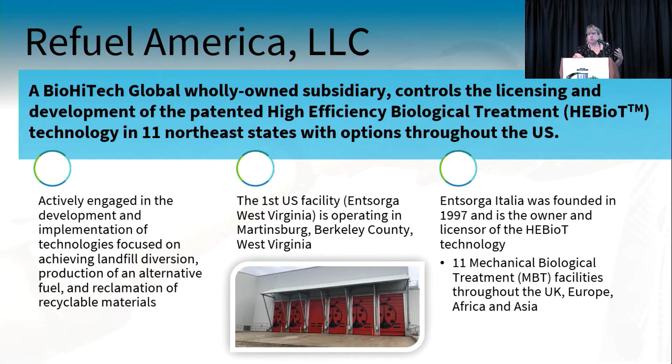As I mentioned, Entsorga West Virginia is the first facility in the United States of its kind. Entsorga Italia has 11 of these facilities throughout Europe. So we are at a commercial scale. We're not bench scale. We're not just trying it out. We have the first facility. A little bit of history about the project. It took 13 years to get this project from first thoughts of the Italians bringing it to the United States to where we are today, generating fuel.

I've been with the project all 13 of those years, from doing the permitting to getting financing to overseeing construction to actually doing some management of the facility itself. We've now hired a general manager for the facility. We are fully staffed, and I'd say we're probably at about 40% production right now, and we're growing. As we jump the hurdles of being the first and figuring out what the differences were between the European waste and the US waste, and there were some significant differences, we've been able to make modifications to our plant and to help move it forward.

Basically, the HEBioT technology takes traditional mechanical biological treatment and we kind of mush everything together. If you consider there's a three-step process, basically. There's pre-treatment, which is separating it by size. 7 inches and greater becomes an over. 7 inches and smaller becomes an under. The 7 inches and over gets made into fuel right away.

The 7 inches and smaller is majority your organic material, as well as your tins, your aluminum. Some of your metals are going to come out there. A lot of your fiber is going to come out there. That all goes into what we call our biooxidation hall, and I'm going to show you all this here in a minute in a quick video. But that biooxidation hall basically is a huge composting facility that's indoors. There are no odors from our facility.

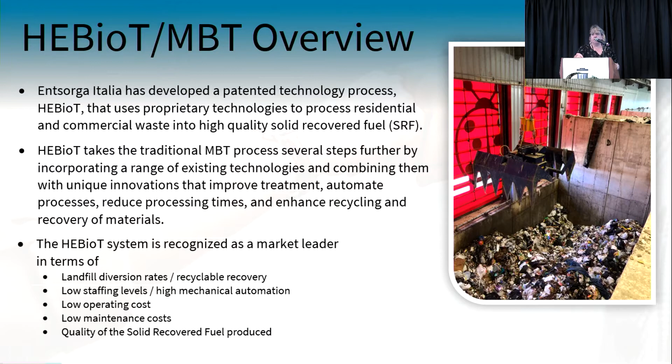So we began taking MSW. We take in municipal solid waste, just standard residential little house on the corner waste, as well as commercial and industrial materials, non-hazardous secondary materials, predominantly fiber as well as plastics, that we convert into a light, crunchy, fluffy paper by the time we're done.

That's then currently blown into the preheater precalciner at a cement plant that's located about 2 miles from us. We manufactured our first fuel in May of 2019, and we had our first fire in September of 2019. As a lot of you probably know, waste facilities like to catch on fire. So we had a lot of lessons learned from that.

We've installed thermal imaging cameras throughout the facility so that we have a constant recording of what our temperatures are. Luckily, we have not had another fire. We've actually had 2 fires, and we have not had one this year.

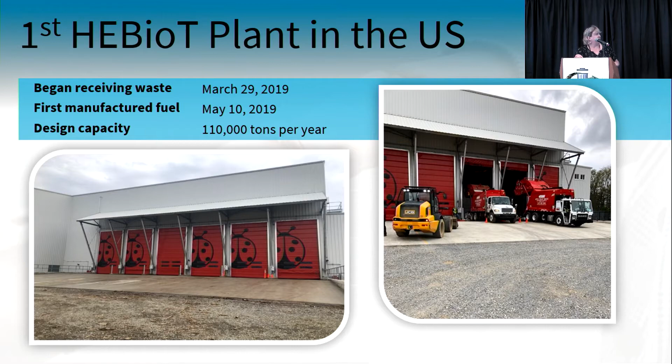Our facility right now is permitted to take in 110,000 tons per year of MSW and C&I. Right now our model in West Virginia is about 80% MSW and about 20% C&I. Models going forward, we're learning, are probably going to switch that up a little bit. We're probably going to go more like 60% MSW and 40% C&I, because the C&I market is so great,

and because the MSW market in certain areas of the country, it's hard to get that much waste all brought to one location when you put in the transportation costs. So those are some of the things that we're looking at, and we're seeing that it's working fine to change that model depending on where we are. So we have some flexibility with it.

This is a quick video. It's about 5 minutes long and gives you a day in the life of what our facility looks like, and I'm going to try and talk over it. We'll see how that goes.

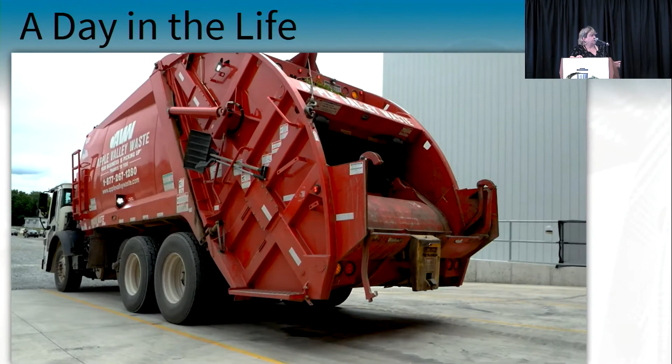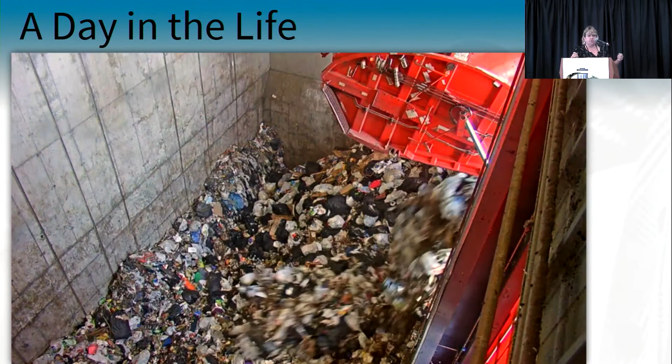So the trucks come in. Everything is automated in this plant. Trucks come in. They dump into 26-foot deep pits. Everything is from the control room. So there's no guys sorting waste. There's nobody having to touch it other than if we have mechanical issues. We have 2 overhead cranes, 3 tons apiece. We pick about 2 tons per.

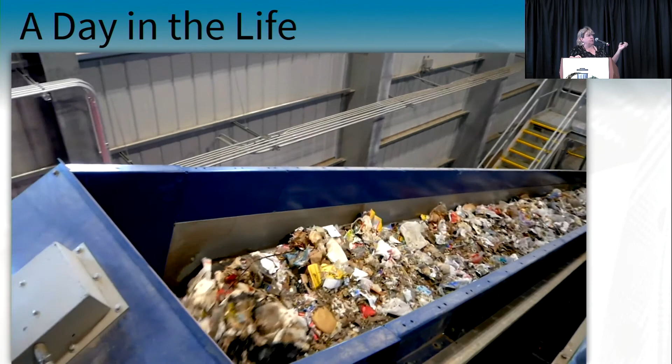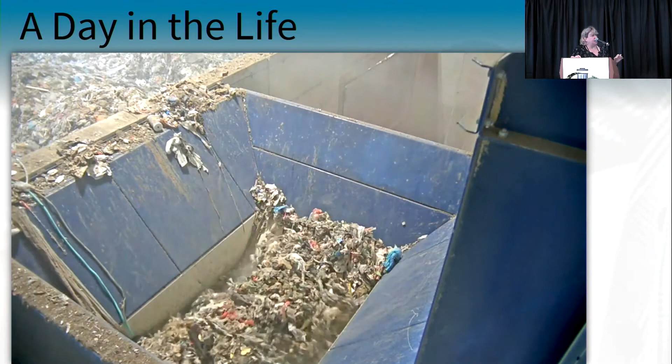It goes into the first hopper and then goes through a trommel, and this is where we're getting that sizing separation. This would be our unders, so that's our real good carbon material. That material is taken to this biooxidation hall. Currently, we have 4,500 tons of MSW in that biooxidation hall, and there are no odors.

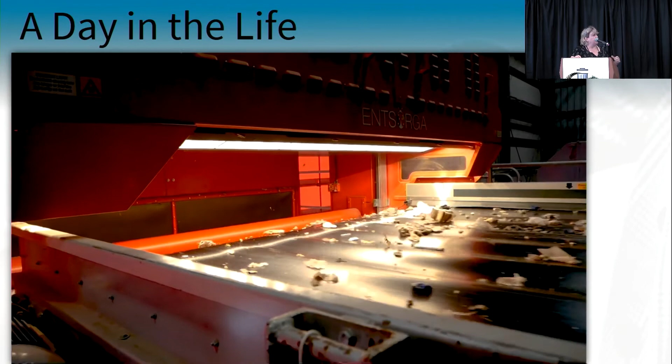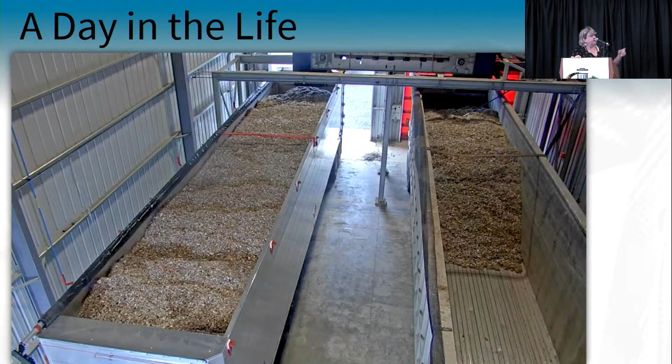That was the mezzo shredder. That's the first shredder. This is the near-infrared sorter. That's kicking out PVC plastics because we can't have chlorine in our fuel. We have 2 magnets and 1 eddy current that's pulling out the metals, the ferrous and the non-ferrous, which then go into the recycling stream of the local community, and that's the actual fuel. We haul that fuel right now in 40-foot long walking floor trailers.

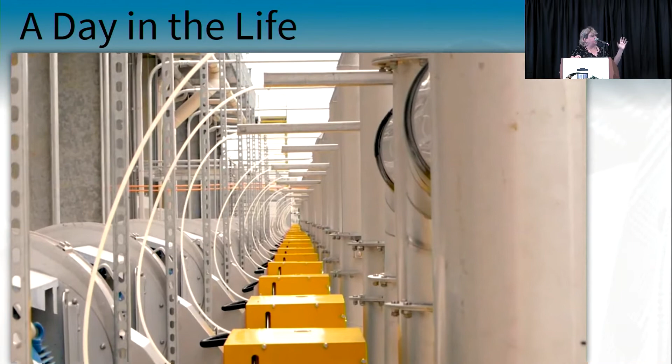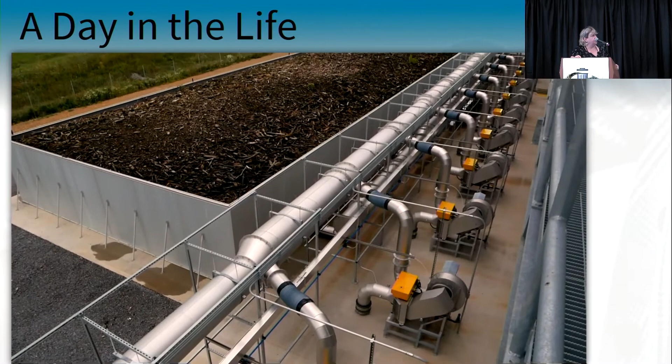This is the fan system, the ventilation system that's pulling that air out of the building and pushing it through this huge swimming pool that you're going to see here in a second. There's 26 fans. We have 24 rows of waste within the building, and then this is the biofilter itself. You'll see on the left side, that's actually Argos cement, which is using our fuel. It's about 2 miles away.

So I don't think any one of these talks is complete without figuring out where you fall in the waste hierarchy. So really where we fall in is the recycling and the composting, because we are pulling out the metals.

That biofilter that I showed you behind the facility, that material will actually be excellent for composting when it's done. And then energy recovery. Our fuel right now, the test results that we just got back, Stephen's going to give you a lot more details on it, but our test results really are coming in somewhere between 10 and 12,000 BTUs. So we are in the range with coal.

Right now it's about 1.5 tons, 1.75 tons to a ton of coal is the offset that we use. Our emissions are lower than that of coal. In order to get our EPA comfort letter, we had to show that we were comparable to or better than coal on all of the hazardous constituents. So I did a real cursory review because we just got the results back, and we actually come out even better than we did with the Italian fuel.

So that U.S. fuel is working very well in our system, and it's working very well for Argos Cement. We currently are contracted to provide them a little more than 3/4 of the fuel that we make, and they have made a request that we send them absolutely everything we can make as soon as we can make it. So that's a good thing. The biggest hurdle that we're facing right now is getting enough MSW into our plant on a regular basis.

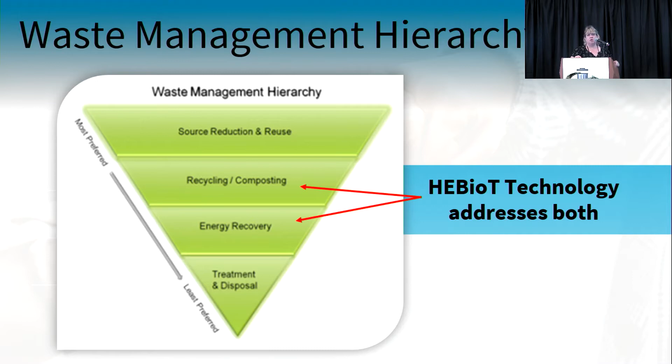So the process basically, like I said, is 3 parts. It's pre-screening, so that's the sizing. It's the biological treatment in that big biooxidation hall. It's the mechanical refinement and sorting, which is pulling out the metals and the PVC plastic and then shredding it down to that 2-inch size. We lose about 30% of all inbound weight of our material just through evaporation, through that whole composting process. We recover the PVC and the metals and the inerts.

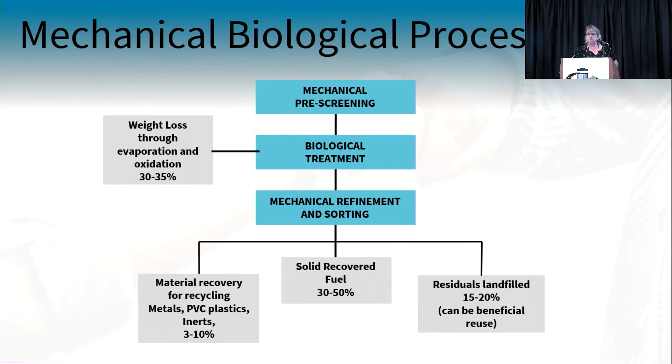The inerts in particular, we're doing a study right now with Marshall University, which is a local West Virginia university, on where those fines can be used as an aggregate in road base, and potentially in the cement industry itself. We'll be getting a lot of that data back over the course of the next month or so. And then residuals are landfilled. Those residuals are the things that you just can't make into fuel, like shoes and car seats and the other strange things that we get in the waste.

So the benefits. Our facilities are modular to some extent, where we can ramp up by size just by changing the size of the biooxidation hall and adding another line within the refinement area. So we can go anywhere from 110,000 to 300,000 tons inbound of MSW and C&I. We won't ever want to build one as small as 110,000 tons again. There are economies of scale that just don't make sense to build them that small, but that's where we had to start in order to prove it out.

We do increase the recycling rates in the community. We are located on property owned by Berkeley County Solid Waste Authority in West Virginia, and so we co-locate with them. We take all of their plastics, which they can no longer recycle. There's no market for it. They have no place to send it. So we're taking those, and they take our metals. So it works out very well. We also pay a community host fee. We pay 50 cents on the ton to the community that hosts us.

In the state of West Virginia, they have a very strange way of managing their waste. They have a Public Service Commission that basically guarantees that if you get a certificate of need within the state, then you won't have any competition. We were under the Public Service Commission. If you fell under it, you also had to pay them $8.75 a ton of everything that you made. Due to legislation that we got passed during the last legislative cycle, we're no longer under the Public Service Commission. By getting out from underneath there, we opened up the market of who we could accept, as well as not having to pay $8.75 a ton for all of our materials.

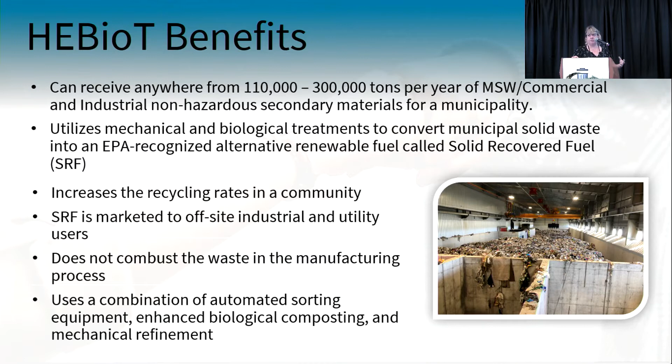The state of West Virginia saw that as a very positive move. They're very motivated to become something other than the coal state, which I find interesting, and it's one of the reasons why we chose West Virginia as the first location, because they were such a coal-centric state, and they're looking to become the technology state now.

Who is the technology right for? Well, counties, states, and municipalities that are having landfill capacity issues. You can basically think of a HEBioT facility as a renewable landfill. We just bring it in and send it out.

As you said, we make shit disappear. I really want that on a t-shirt because it can be taken so many ways in the waste industry.

We do achieve a more sustainable and modern waste management system. Waste management is on the forefront right now. We've spent 30 years educating people on recycling, and I don't know that it was overly successful. And we now need to spend the next couple of years educating people on the value of waste as a commodity and where it can be used to create energy within our country. We're behind on that, and I really think that needs to be a focus going forward for anybody in this industry. It is good work conditions.

For our facility, we run 18 hours a day, and we run it with 15 to 18 people. Right now, labor is really hard to find and really hard to keep, so that's another one of the challenges that we're facing. It is a fully automated process, so everything is done from the control room.

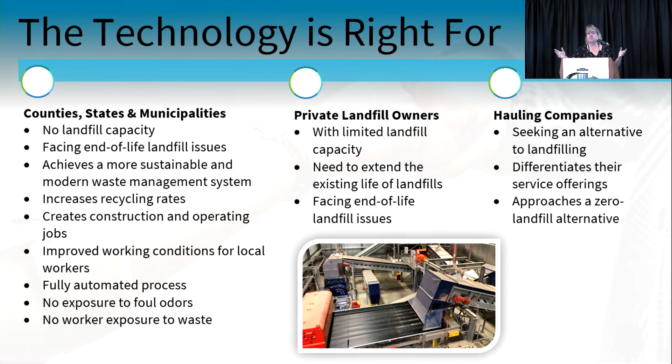Private landfill owners also, who have limited capacity, who need to extend the life of their landfills, this is a good option. Co-locate one of our facilities on your landfill. You can even harvest landfills and feed our facility, is one of the other things that can be done with it. And then hauling companies. It differentiates you. I know none of you guys are probably in the hauling world, but haulers now need to find a different story to tell as to what they're accomplishing.

So what have we accomplished in our first full year, which would have been in 2020? We received 23,492 tons of MSW, so we were only at about a quarter of where we need to be. We received 3,667.45 tons of C&I waste, and that's growing every day. We sold 11,062 tons of SRF, so 615 trailers made their way over to Argos and back. And we have already achieved the 615 trailers so far this year, so we are improving. And then 41% of our inbound volume was converted into a high-quality SRF, and that's right within the metrics of what we thought it would be.

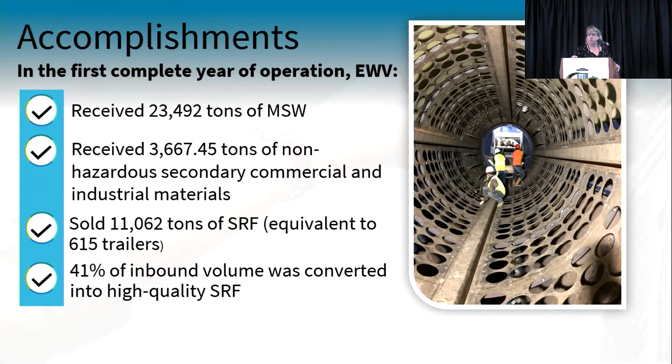So what's next for us? Well, due to West Virginia passing their legislation that made it so that we were considered a manufacturer and no longer a solid waste utility, we're looking to build more facilities in West Virginia. They want us, and we like to be there. We do have a permit in process in Rensselaer, New York. We have other projects in the New York area that we're keenly pursuing, and we're being pursued as well, which is good.

And then expanding the uses of the SRF, that's really the growing market. That's where we need to be, and that's where Lone Cypress comes into play for us, is now that we know through Department of Energy grant programs, research that's been done, the analysis that came back on our fuel, we know that we have an excellent fuel for conversion into syngas or other gasification projects.

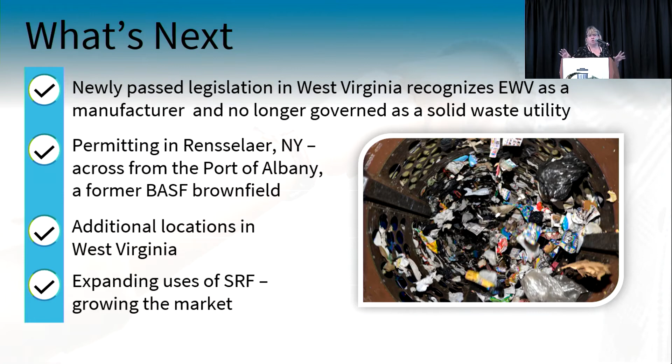So I'm going to turn it over to Stephen Brooks from Lone Cypress, and then we'll take questions afterwards.

Thanks, Emily. Good afternoon, everyone. My name is Stephen Brooks, Vice President of Engineering and Operations for Lone Cypress. Lone Cypress is an energy infrastructure developer based out of Tulsa, Oklahoma. We specialize in 4 different business lines within the broader energy value chain. The first being waste to energy, which is why we're here today.

Additionally, hydrogen generation and distribution facilities, so blue hydrogen, green hydrogen through the traditional methane to hydrogen pathway, as well as biogas to hydrogen. Also carbon capture, storage, and utilization. It's becoming a bigger and bigger business line as the years go by and the regulatory environment shifts to be a little bit more stringent on associated emissions from industrial processes, transportation, and sectors of that nature.

Last is traditional oil and gas midstream infrastructure, so pipelines, cryogenic facilities, amine treating systems. When you look at those 4 business lines, it kind of seems like we're scattered all over the place, but they're all accretive to one another in numerous ways, which I'll get into later in the presentation. Lone Cypress specializes in project management, EPC services. We also do system operations and commissioning.

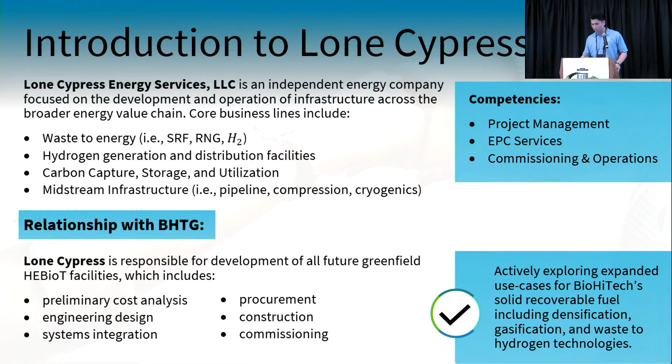Our relationship with BioHiTech is that we are project managers for all of the new facilities that they hope to build in the coming years, as well as investigating tailgate technologies to take the fuel that they're creating at present and gasify it, pelletize it, or make it suitable for end users depending on the jurisdiction in which you're developing the facility.

So as Emily touched on, we feel that the HEBioT, or the high efficiency biological treatment process, creates a fuel that is more reliable and robust in terms of constituents. We like to separate the process into 3 distinct process areas: the pretreatment facilities with the tip floor, as she was showing in that video. Beneficial for the system because it helps the operators visualize and eliminate any of the inbound feed that won't be

compatible with the system. Within the biooxidation, there's essentially those 26 fans that run off VFDs that are based on the automation of the facility. The system is actively testing for moisture content and then drying according to the needs of whenever the fuel has entered the system, and based on the process through the system, either kicking on fans or increasing flows or decreasing flows depending on how mature the fuel is in the process.

And then last, the refinement process, where they're blending now this MSW that has come in, being treated through the pretreatment system and has gone through biooxidation, which essentially acts as a composting environment. Within refining, you're now blending in C&I streams to increase the caloric content, and then it just ensures consistency with the fuel production process.

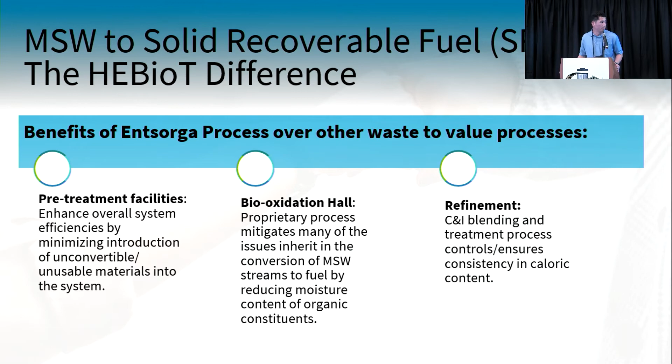I think that positions us well to start a due diligence process to understand at the end of the plant, when we created SRF, what tailgate technologies can we put in place to make our fuel more acceptable for a larger market.

As Emily alluded to, we actually just received some very promising laboratory results on the SRF that BioHiTech is creating. We've run a proximate ultimate analysis along with the heavy metals and a BTU analysis. Very promising results in terms of BTU content. We're right at that comparable with coal range at 12,000 BTUs per pound. Very low moisture content, anywhere from 8 to 10%, which is accretive to the gasification process. We also have low mercury levels, low sulfur content. The sulfur content being especially important for our offtake market at present.

As Emily alluded to, our only offtake partner at Martinsburg is a cement kiln. In the cement industry, the alkali to sulfur ratio is very important for those systems, and so keeping that sulfur low is important for our offtake partner. They won't accept our fuel otherwise, and so again, just another benefit of the fuels that Entsorga is creating through its process. Trace amounts of heavy metals, all promising signs for this next conversion process and the due diligence that we're doing right now.

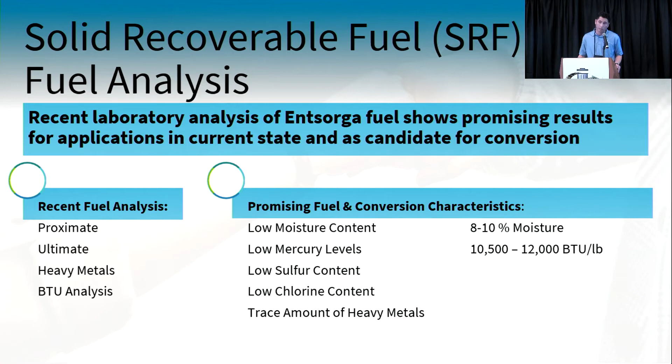So where we are today is we know that we're creating a good fuel in our SRF that is superior to the RDFs that we've seen, in the sense that our BTU fluctuation is not to the large degree that you see with other RDFs on the market today. Moisture content is very low, and then other contaminants are trace amounts, to the degree that we feel confident that for any inbound facilities for the gasification process, or even the waste to hydrogen pathway, that will eliminate a lot of those expenses and make those systems more efficient and economic.

Our current process is just co-firing the SRF with traditional fossil fuels. As I said, the cement kiln that is about 2 miles away from Entsorga, they are taking the SRF we're creating and then feeding it into their system where it is being fired with coal slag. We had analysis of this process done on a bench scale with an engineering firm out of Florida, which showed very promising results, and then obviously is happening at a commercial scale now at Argos. And so that has been a good partner in the interim time, given in cement manufacturing, really the only thing that you're worried about is getting to that BTU level.

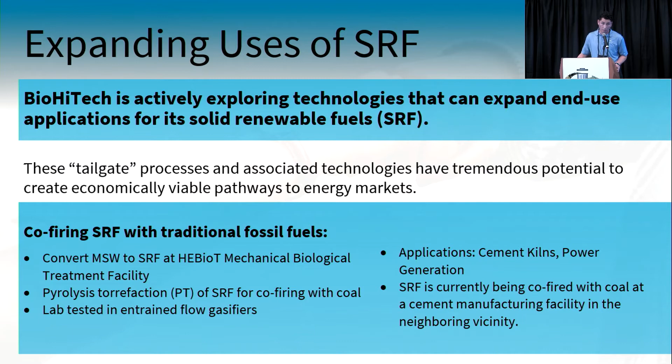But as coal-fired power plants are being phased out and the cement industry is coming under more and more scrutiny in terms of the emissions associated, we feel that the offtake partners in jurisdictions like California, for instance, become very, very limited if the prospect is taking our light, fluffy SRF and trying to make it, let's call it, compatible with existing energy systems, which is why we feel that the gasification pathway presents a lot of potential for expanding offtake markets.

And so when we talk about these tailgate technologies, we are exploring the myriad of technologies that are on the market today, which is why we're here at this conference, and I hope to connect with some of you who are subject matter experts in exploring these things.

We have found that, and I don't have to tell you, you have issues related to scale, right? We're at 110,000 tons of inbound MSW into Martinsburg, which translates to about, let's say, 45,000 tons of outbound SRF, and I can't remember which gentleman said you're looking at around the 300,000 ton sweet spot for the gasification process, which kind of holds with what we've been seeing. And so we're trying to find a modular gasifier, but also exploring other options.

Again, waste to hydrogen, our specialty at Lone Cypress being that hydrogen pathway, more from the methane origination route. But talking into biogas, we feel that the latest analysis we've gotten back on the SRF is very promising for the waste to hydrogen pathway, just given the low amounts of heavy metals and the necessary refining and purity required to get hydrogen to be compatible with fuel cells for transportation markets, which we feel is an emerging market for hydrogen utilization over the next, let's call it, decade. And then combining that with carbon capture technologies, again, just lowers your associated emissions.

We've also explored torrefaction to just mild pyrolysis of the SRF to try to understand if maybe we can stabilize the product. One of the issues that BioHiTech has with the SRF as present is fuel stability. If you let that fluffy paper sit out for, let's call it 48 to 72 hours, moisture leaches back into the system and it just becomes waste again. And so part of the reason for trying to convert it to another fuel is the stability for transportation economics as well. When you densify the product, running it through a pelletizer or briquetting it, you can fit more in a truck, which obviously helps your transportation economics.

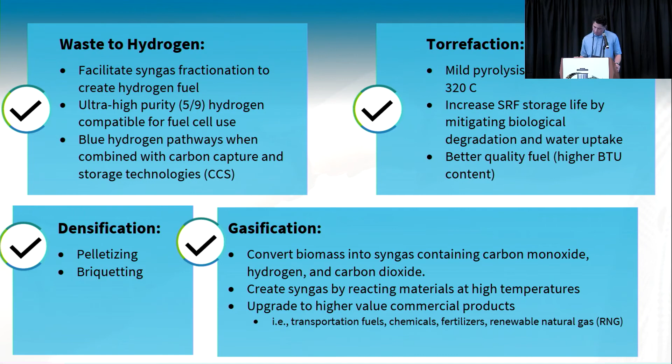In jurisdictions like West Virginia, when you're competing directly with coal in applications like power generation, we feel that the SRF as is is probably the best bang for your buck you're going to get in the market. But in other jurisdictions like California, if you could facilitate that pathway, you're going to get subsidized to a very large degree. And if you can combine that with some sort of carbon capture technologies and get access to that 45Q, that is also going to add buoyancy to your project economics.

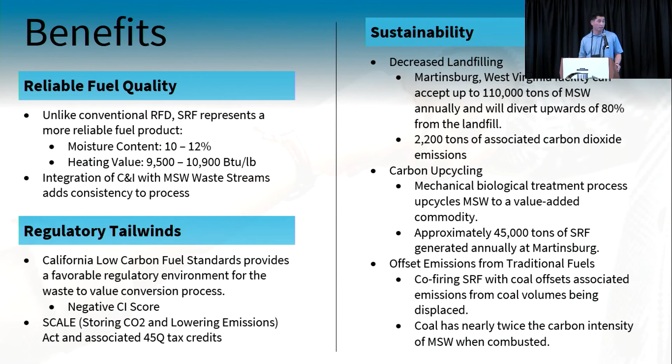Emily touched on a lot of the sustainability metrics coming from the HEBioT technology. Obviously, just the diversion from landfill is a big plus. And then you're now diverting carbon out of a landfill and upcycling that for uses in other energy systems. And that's going to offset emissions associated with, for instance, if you're knocking coal out of the system used at the cement kiln and you're using SRF instead, that is coal that is not being burned, and greenhouse gas emissions that are not being emitted to the atmosphere.

What are our challenges? I've touched on these throughout this presentation, but the first and foremost being skepticism from our inbound markets. Not only do I have to convince somebody that this garbage that I've turned into energy makes sense for their energy system, it's going to be reliable in terms of its caloric content, and it's not going to gum up the system that they currently have in place, which is a much bigger lift than it would seem on the onset.

Additionally, just educating the public as to what can be accepted in the system. Emily touched on this, just the recycling education, or the push to educate the general public, and the shortcomings associated with that. I know that she had to overcome a lot in Martinsburg. And then just educating the end users as to the benefits of SRF, as well as local municipalities, explaining to them that this isn't an incineration process. I know that everyone gets running and scared when you mention incineration.

And then just general NIMBYism. I would say that I was pleasantly surprised the first time that I visited Martinsburg to be standing outside the property and not smell any associated gases that are coming out of the facility.

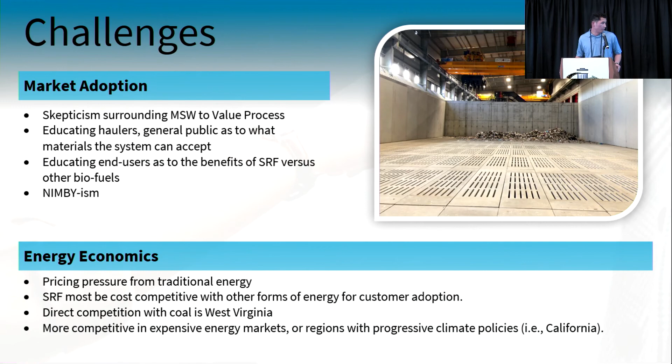Additional challenges relate to energy economics. Again, regardless of where you are and regardless of how incentivized the local municipality is to go greener, you're still competing with conventional fossil fuels when you think about translating waste into any energy system. In West Virginia, like I said, it's not a super favorable environment for that, but in California, we feel more confident that there's markets for fuels of this nature.

Additional challenges, again, transportation economics. We've looked at applications where there's rail takeaway available, which caters very well to SRF. Also barge takeaway. Some jurisdictions there's neither, but you have pipelines in the area. And so it's just really figuring out the best fit solution for the infrastructure constraints surrounding a specific project.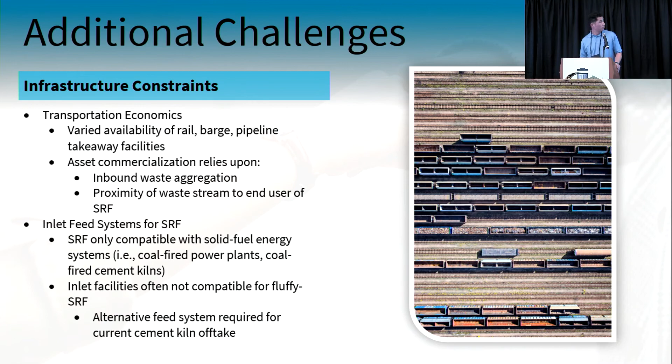And again, aggregating waste, obviously the inbound aggregation to justify putting down the initial MRF as well as the gasification process. And then making sure that if you are supplying SRF to some end user, that their energy system is compatible with the SRF. For instance, at the cement kiln that we are currently offloading to, we had to build a custom inlet system for the fuel, which again adds another constraint to your project economics. And so now I'll take any questions.

What is the fraction of the biogenic carbon in your product versus non-biogenic? One second. I don't know it off the top of my head, but we did pull the carbon numbers. Fixed carbon is about 9% on average. 9% biogenic out of the total carbon? Yeah, that's the fixed carbon. No, the total carbon in the product's source is obviously plastics and paper and everything. So how much of the feedstock is biogenic versus non-biogenic? About 50%. It comes out to about 50-50 in the product. Yes.

50-50. Do you know what is the carbon offset related to the product if it has gone through some energy conversion? Did we get the 2,000 carbon equivalent? 2,000 pounds. I can get you the numbers. We've got them in a calculator spreadsheet that we've put together.